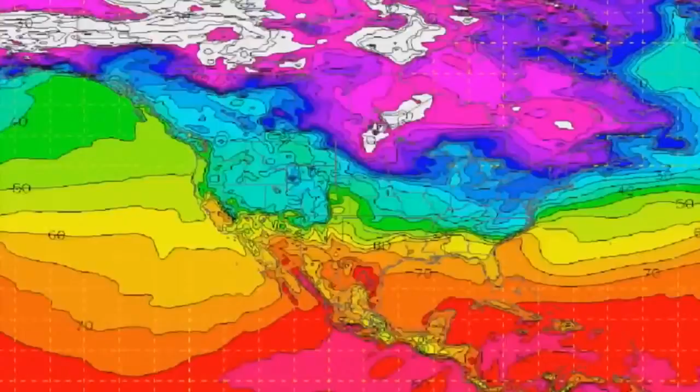In the real world, the answer to the question of can we see into the future has been answered with a resounding no. In our ever-evolving society, the trend today is to look toward the future by relying on predictive modeling to best predict the probability of an outcome. But we all know that even these well-thought-out predictions based on data often turn out to be not so predictable.

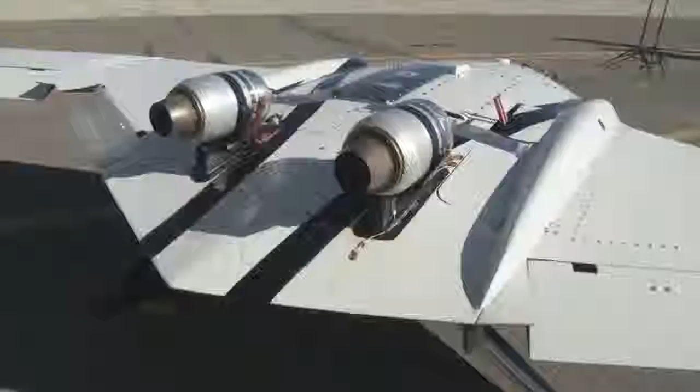Although it's clear that future events remain virtually unknowable, there is one group within NASA that comes as close as you can to seeing into the future. Throughout NASA's field centers, members of the Fixed Wing Project team are peering into the future every day and coming up with concepts that they believe will be on the next generation of aircraft. Because it takes years to plan and develop these concepts, the hardware and theories that are being tested today will be key components that enable the next generation of aircraft to take flight.

On this episode of NASA X, follow us around the country as we visit members of the Fundamental Aeronautics Program's Fixed Wing Project, who are developing the framework that will shape how aircraft of the future will fly. Take a look behind the gates of NASA to see what some of these new ideas look like and how the engineers of NASA are paving the way for the ideas that will change the future of flight.

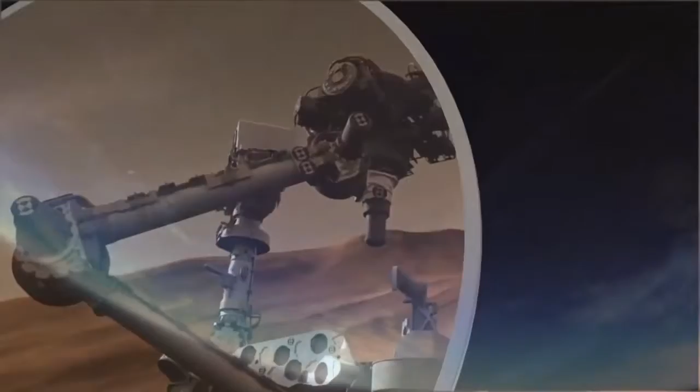To the untrained eye, most of the aircraft of today look very similar. This is because over the past century of flight, aeronautical engineers have worked hard to optimize passenger aircraft to the point where they are as efficient and safe as possible. As a result, the basic tube and wing shape has been configured and examined from every possible angle, making it the most efficient design possible today.

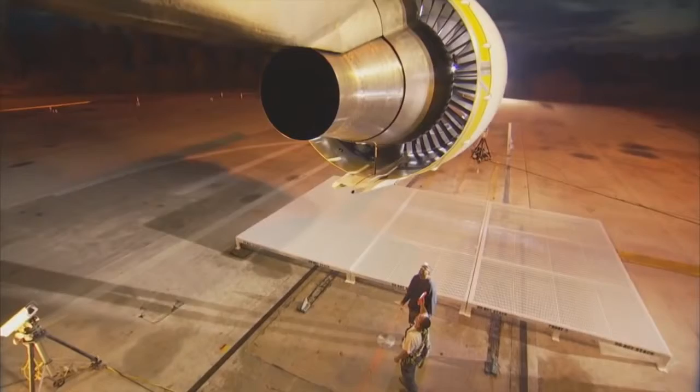Although aircraft have looked basically the same over the past few decades, if you look closely, you can see some of the major design changes. Wings that were once swept back more dramatically now are less so because of advances in aerodynamic shaping. Engines that spewed emissions by the ton are now much more efficient. Materials that were once so heavy that they significantly weighed down a craft are now much lighter and stronger.

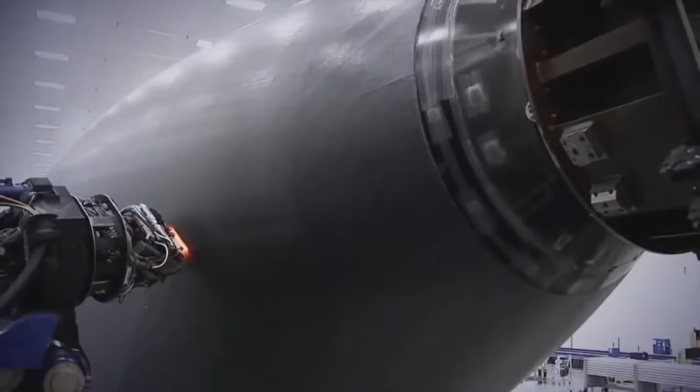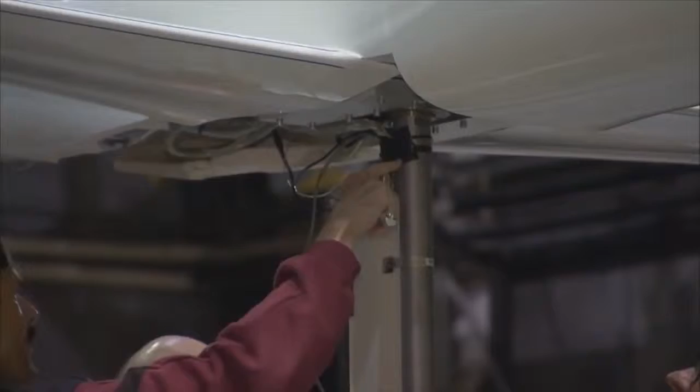With all this improvement and efficiency, it is fair to ask if there is anything else that can be done to make flight even better. The answer is of course yes. Behind the gates of NASA, there are scores of researchers who know that we can still make aircraft better because they are working toward these long-term goals every day. Some of these researchers from the Fixed Wing Project are working on so-called N+3 configurations and goals.

In mathematical terms, the letter N is where you start now. N+1 is the next step. N+2 is just beyond that, and so on. Here in the Fixed Wing Project, N+3 equates to aircraft that will be flying in around the 2030-2035 timeframe. For this team, everything is on the table, including engines, fuels, wings, and fuselage shapes.

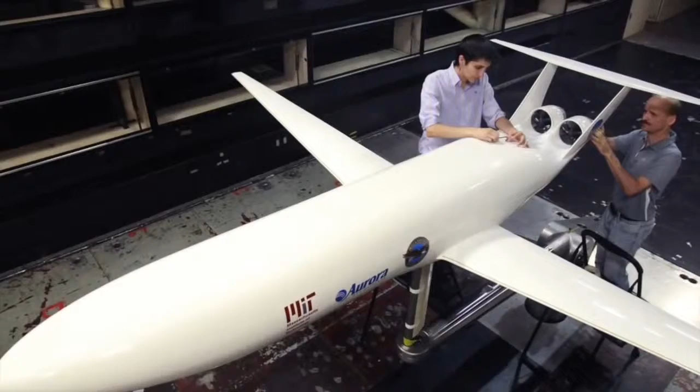Well, we need to remember the first A in NASA is aeronautics. So it's the National Aeronautics and Space Administration. Aeronautics is the field of research for airplanes. The airplanes that fly today were researched and experimented with within NASA many years ago. So we're trying to continue that tradition, that important work that we have done for the nation and the world, for 20, 30 years from now.

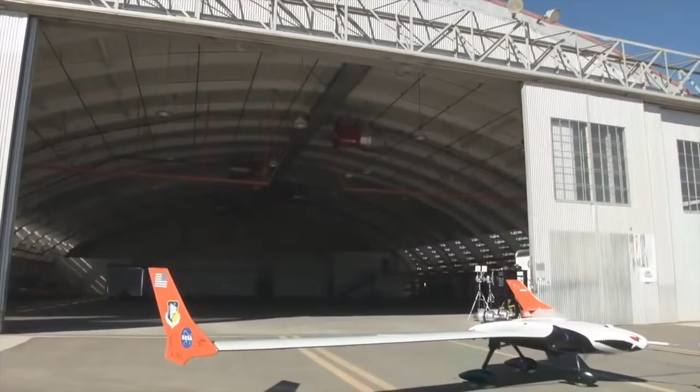Fixed Wing is a NASA research program where we are doing activities to try to improve the airplanes that we're going to be flying in the future. We're trying to make them less noisy. We're trying to make them better for the environment. We're trying to make them in a fashion that they will use less fuel.

The research we're doing is important because air travel is such an important part of your life. People travel, and even if you don't travel, cargo gets carried every single day. You use something every single day that gets carried by an aircraft. It's part of our way of life these days, and it often gets taken for granted. There are challenges though, so we are focused on exploring and developing technologies and concepts to improve the energy efficiency and environmental compatibility of transport aircraft.

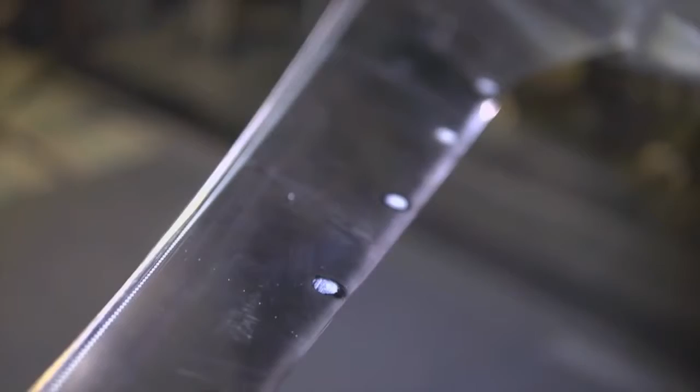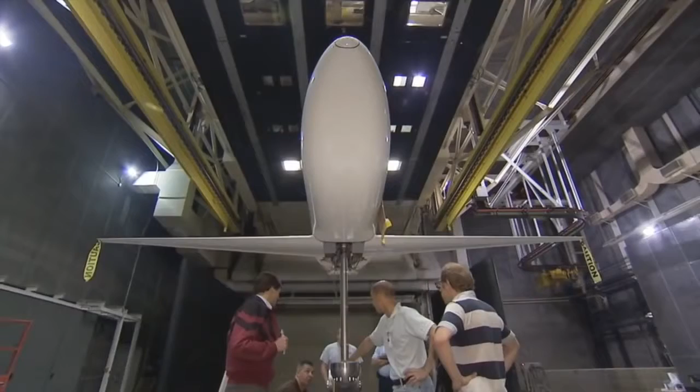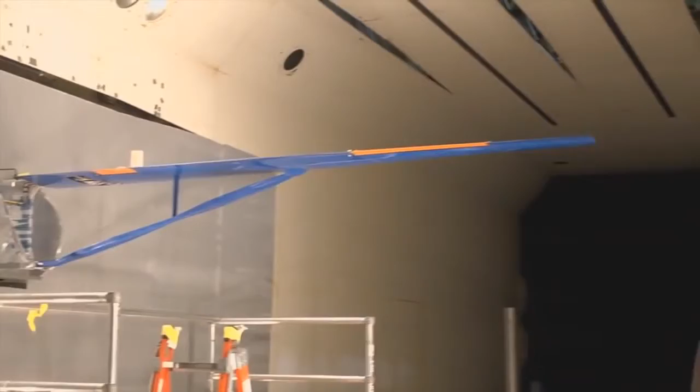With this mandate to significantly lower noise and emissions and increase performance for subsonic aircraft, there will be a need to address virtually every aspect of the current aircraft configuration, including developing new materials and engines, testing alternative fuels, and even changing the fundamental shape of the aircraft. All across the country, fixed-wing researchers are doing just that. Major advancements are being made into the understanding of how future aircraft will fly. Because there are so many areas of study, let's first look at something that has the potential to be used today as well as in the 2030 timeframe: alternative fuels.

On this beautiful morning at NASA Dryden in California's high desert, a test called ACCESS, or the Alternative Fuel Effects on Contrails and Cruise Emissions test, was performed to study the effects of alternate biofuel on engine performance, emissions, and aircraft-generated contrails at altitude. For this test, 2 aircraft were flown in tandem. The first is NASA's DC-8, which will be burning an alternative fuel.

The second aircraft is NASA's Falcon that will fly directly behind the DC-8 to measure and characterize the emissions coming out of the engines from the alternative fuel. Here is NASA's Bruce Anderson to explain. NASA's role is in assessing the combustion characteristics of alternative fuels, as well as determining how these fuels will affect the performance and emissions from aircraft.

To understand how aircraft affect the climate, we need to make measurements at cruise altitudes. So the focus of ACCESS, or the alternative fuel effects on contrails and cruise emissions, was to fly behind the DC-8 in flight and look at its emission and contrail characteristics as we changed from standard jet fuel to a fuel that was a blend of a fuel that was made from camelina plant oil, and also added 50% of Jet A to that.

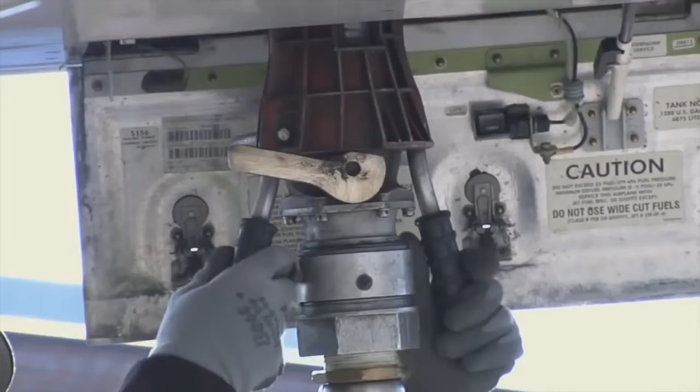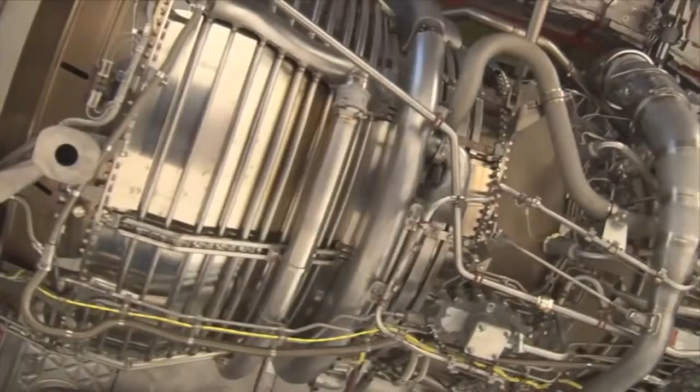The fuel also has to have similar characteristics in terms of density and volume to kerosene. So what we're looking at is drop-in fuels. A lot of the fuel systems on the aircraft are designed to rely on the aromatics in the fossil fuels to swell the seals to make them leak tight. So when we fly an alternative fuel, we have to mix it with standard fuel to retain those properties. Otherwise, the fuel would just leak out of the aircraft.

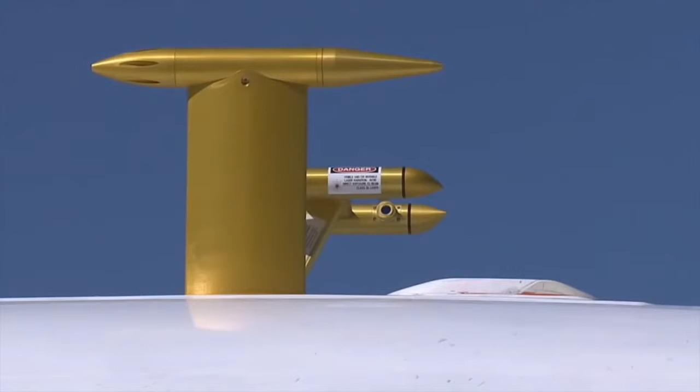And then the second thing we're looking at is just the emission characteristics. By that I mean the amount of pollutant generated per kilogram of fuel burn. After the first few flights, it was shown that using these types of alternative fuels could significantly reduce emissions at cruise altitudes, particularly soot emissions. Work continues to better understand how to use these fuels and how to make them even more efficient for future aircraft.

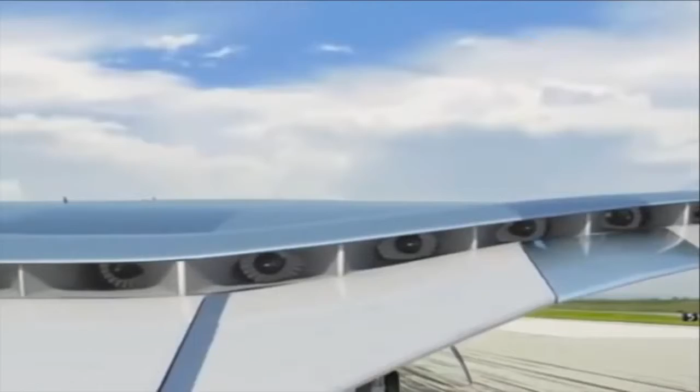Other than alternative fuels, there are some other ideas out there for finding more efficient ways to power aircraft. If we look on our roads today, many of the cars that are now being driven run on a combination of fuel and electricity. The idea that aircraft could do this seemed far-fetched only a few short years ago, but today, this idea is gaining traction. There are several ideas on how to do this, so let's take a look at a few.

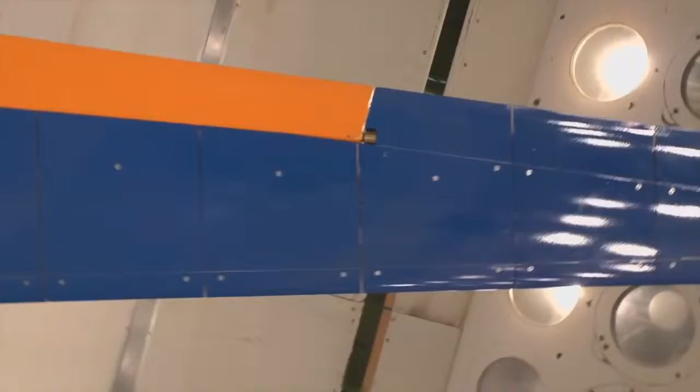Here, a team is looking over a new Boeing aircraft design called Sugar Volt. This unique design has several interesting changes, like the truss-braced wings that have the potential to reduce the drag of the wings by making them longer and thinner. Because thin, long wings have the tendency to flex more, designers have included a clever, efficient truss structure to support them. This design has the potential to reduce drag and weight, thereby making the craft more efficient to operate.

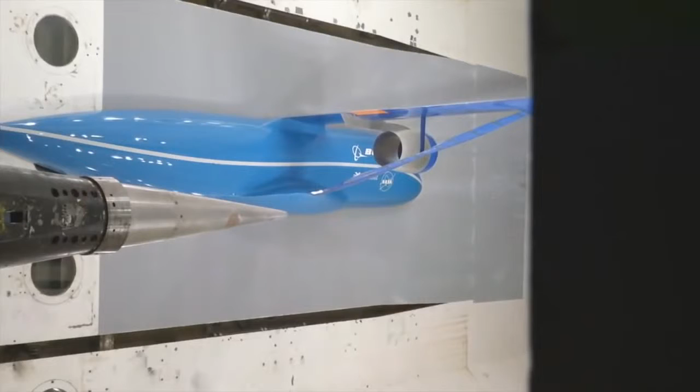At first glance, those unique structural changes may look like the biggest game changer for this type of aircraft, but the Sugar concept holds another surprise as well. In the case of the Sugar concept, what's less obvious to the eye when you see it is that it has an unconventional propulsion system. It's a hybrid gas-electric concept that's closer to what you see in a Prius. It has batteries and a gas turbine engine technology.

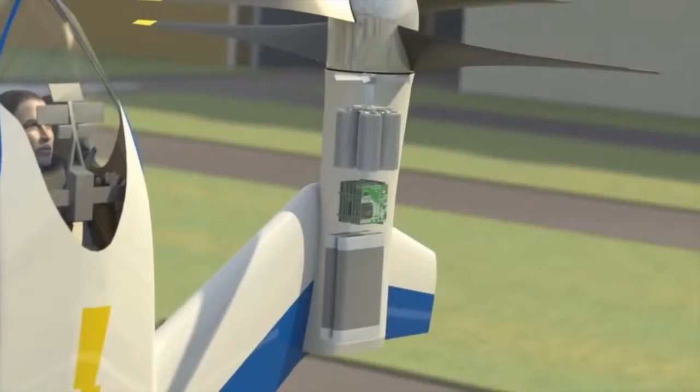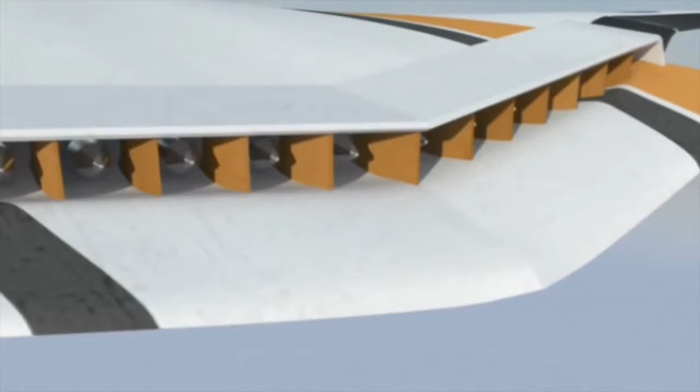It requires advances to battery technology, but those are happening throughout the world independent of the aerospace industry, and we're trying to leverage that. We do it on cars, we should be able to do it on airplanes eventually. The challenge is to take those batteries and have enough energy or power content and have them be lightweight. Where we are today, I think, is we're at the dawn of the age where we can start to see electric propulsion or hybrid electric propulsion.

And you'll see it on smaller aircraft first before you see it on the large commercial transports. But that's what we're working towards. That's good for cleanliness, it's good for noise, it's good for energy efficiency. It has its challenges. That's why we're working on it, and that's why it's not being done today.

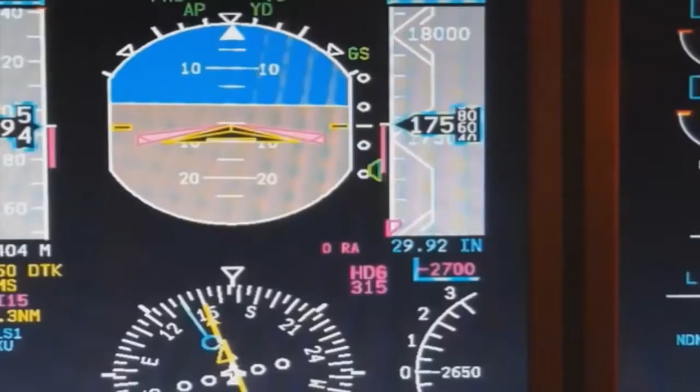The idea behind this vehicle is to have its twin engines burn fuel when great power is needed, like at takeoff. But when the craft is in a cruise configuration, a switch can be made over to a battery electric mode to supplement or even replace power to the engines. If successful, this could reduce the amount of fuel burn by up to 70%.

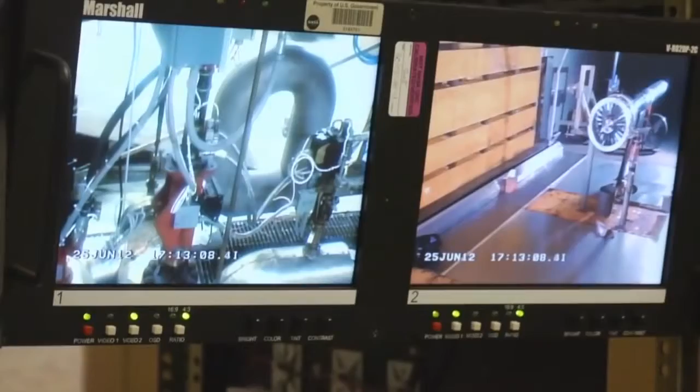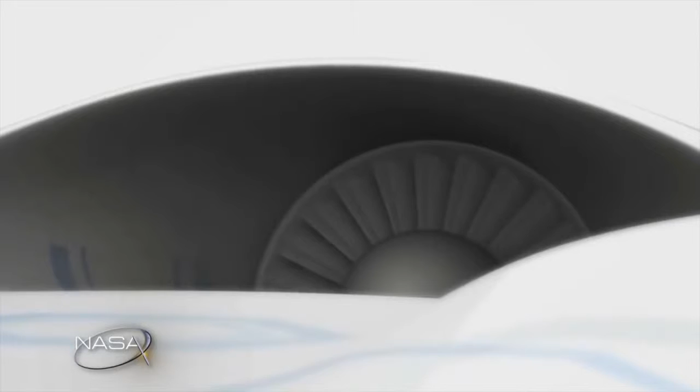Another concept called turbo-electric propulsion is being studied here at the NASA Glenn Research Center. Here is NASA's Jerry Brown to explain. There's not been electric airplanes except in very small size. And the reason is that electric motors and generators tend to be too heavy for flight. We're hoping to change that, and we're hoping to get a benefit from saving a whole lot of fuel in the process. The type of electric propulsion that we're talking about today is turbo-electric propulsion.

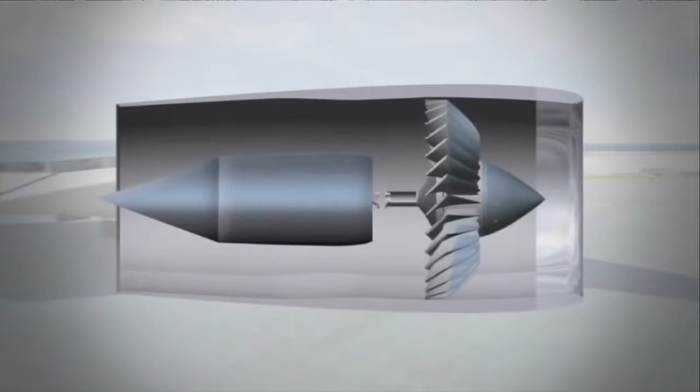We're going to keep the turbine engine because it's really good as far as a lot of power in a small power plant. And then we're going to use its power to drive a generator, send electricity to motors that drive fans that do the propulsion. This concept will look very different from vehicles of today as well. Potential designs include 2 large turbine engines on the wingtips that will drive 2 large generators inside the body. The generators will in turn power a number of fans, providing the propulsion the aircraft needs to fly.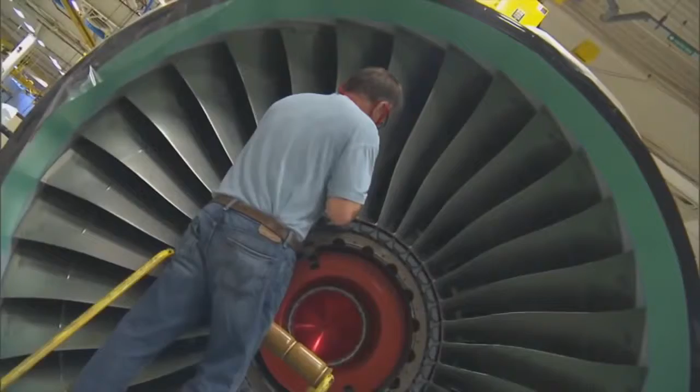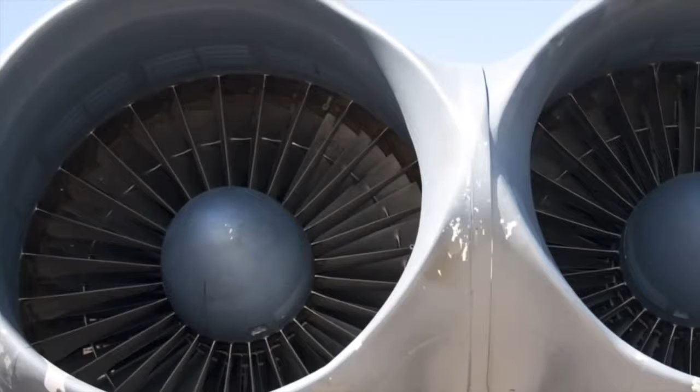What we want to do here is we want to be able to break the turbine engine from the fan, and that gives the aircraft designer a lot of freedom. If he can move the turbine engine somewhere else in the airplane, that may itself have advantages. The engine and the fans don't have to turn at the same speed. You don't even have to have the same number of fans. And that's what we're really looking for, is we want to have an array of a whole bunch of fans, maybe 15 of them, say, and just 2 engines. You like to keep just 2 big engines because the big engine is much more efficient.

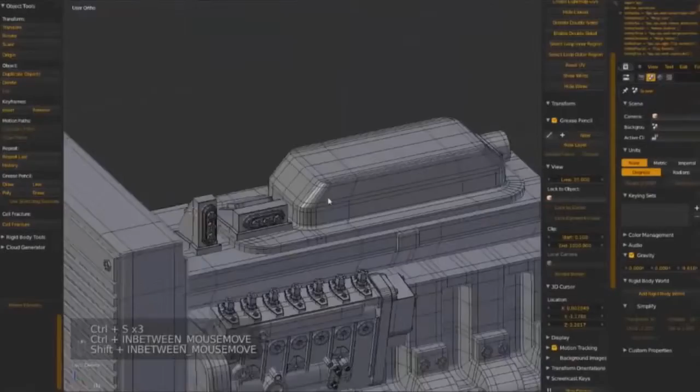This idea is intriguing, but big changes need to be made to make it viable. One major challenge is the need to reduce the size of the generators, because the generators of today are way too big to fit on an aircraft. One idea that the NASA team is looking at is a way to remove the current type of copper windings in the generator and replace it with superconducting material. This change would allow the generators to shrink, making them viable to fit on future aircraft.

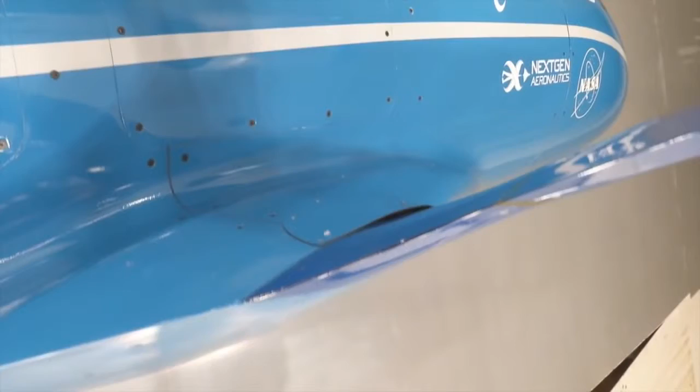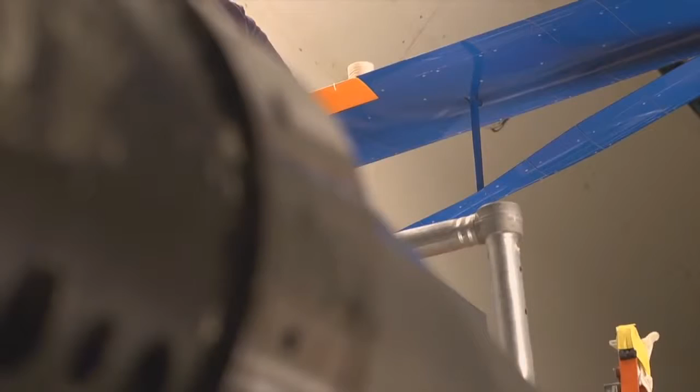As we've seen so far, new aircraft designs are coming online that have the potential to greatly improve aircraft efficiency. Another of these revolutionary designs has come out of a joint MIT and NASA study. This unique design is called the double bubble and has the potential to reduce fuel burn by up to 70% as well. So the MIT D8 double bubble design was something that we've been working with MIT on for a number of years. The idea there is to take some of the lift that you would normally get from the wings and try and move that to the fuselage.

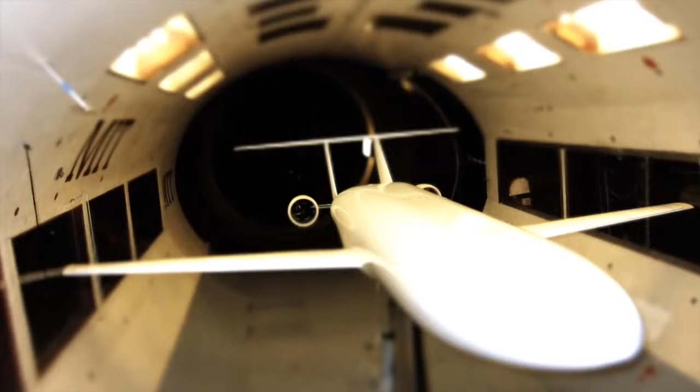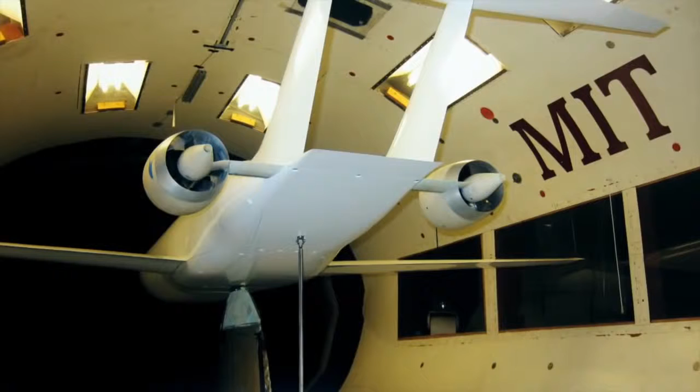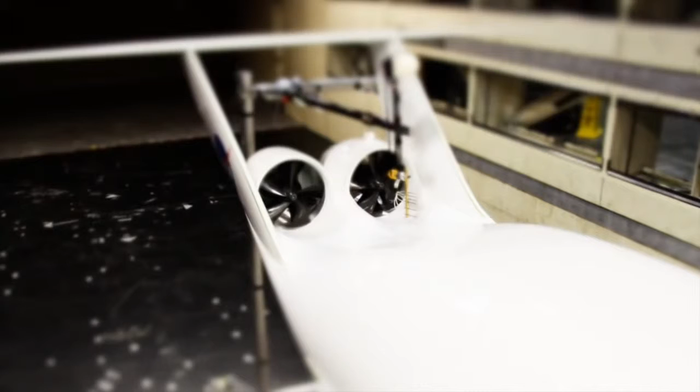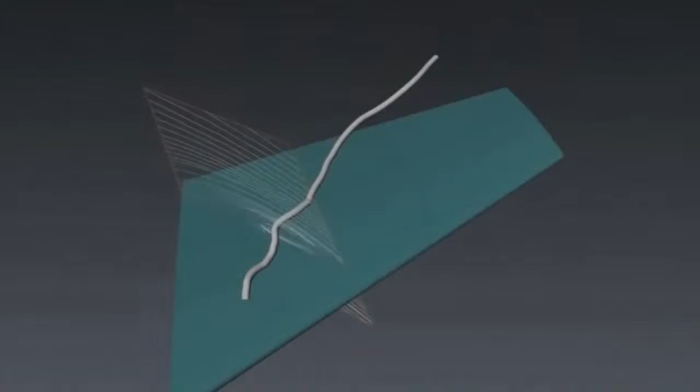Aiding much of the work is improved computational fluid dynamics and wind tunnel testing. Right here in this building we have the Pleiades supercomputer, which is one of the largest supercomputers in the US and in the world.

It has 200,000 processors working on the problem if you use the whole machine on one problem. So it's a very large machine, and we need that very large machine because we need to do very big problems here at NASA. The aeronautics research director that we're using it for is to try and simulate the flow over these N+3 configurations.

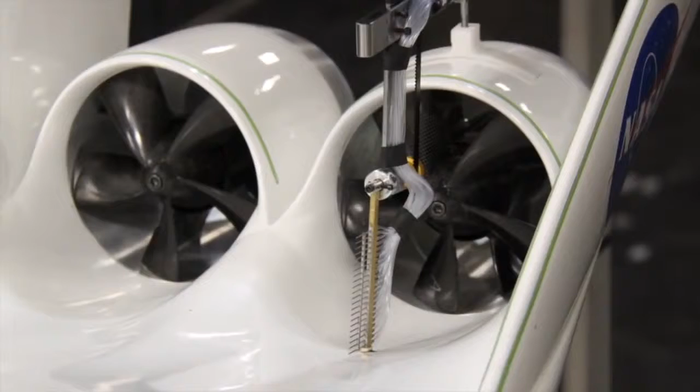So in order to capture all the detail you'd see on a vehicle like this, including what's going on inside the combustors of the engines and things like that, you need to have a lot of grid points to resolve all the fluid motion inside those engines over the airplane, and having that many grid points to resolve all that physics in 3 dimensions creates very large computational grids that require very big machines to advance the equations that govern the fluid motion and get these CFD, computational fluid dynamics solutions that we use to make our assessments.

Aerodynamicists of today are able to model ideas on computers, which allows them to test many different configurations before a wind tunnel model is ever built. Once a design is agreed upon, a wind tunnel model can then be fabricated and tested. This process was used for the double bubble as well, but the wind tunnel test showed surprising results.

The good news is we've just completed the first test of this configuration in the Langley 14x22 wind tunnel at NASA Langley. And it showed even a greater reduction or a more fuel efficiency benefit to this technology than we had predicted on paper with our lower-order models. So we're trying to digest the experimental data that show this nice benefit in fuel efficiency from this configuration.

At the same time, we're also using the supercomputer here at NASA Ames, the Pleiades supercomputer, to do computational fluid dynamics CFD runs of these same configurations and see if we can confirm that benefit on the computational side as well. Testing will continue on the double bubble, and if the results hold, you may see this type of aircraft at an airport near you in the future.

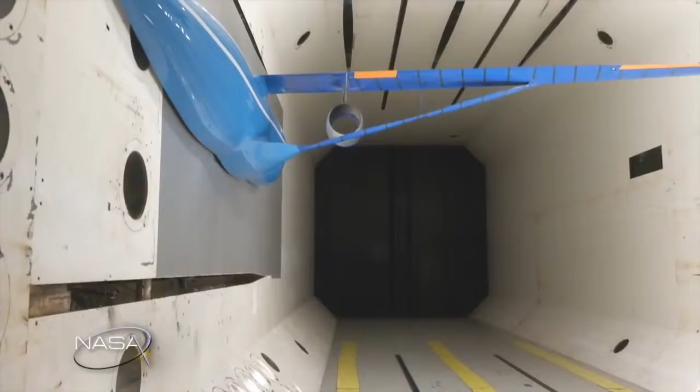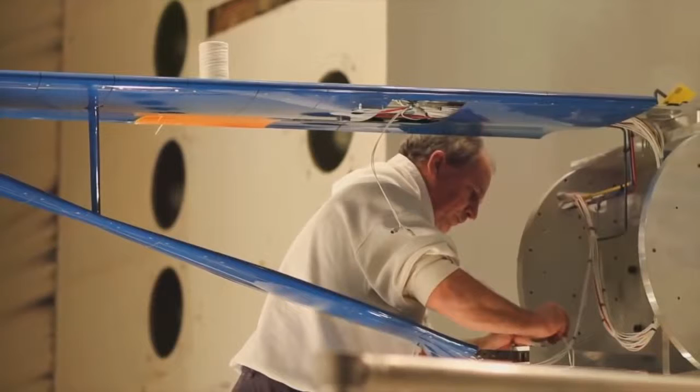When testing aircraft, many different stages occur. We have already mentioned CFD and wind tunnel testing, but another tool in testing future designs is to build a flying scale model. Although CFD and wind tunnel modeling is the mainstay, often test flights of these small, scaled-down versions of an aircraft offer some of the most dramatic results for researchers. That is the case with this aircraft, called the X-56.

This aircraft is being used as a test bed to understand how different wing configurations work and how a unique idea called active control may be used in the future. The whole concept behind the X-56 is that they've long known that a very long wingspan vehicle is more efficient than short wingspan vehicles.

Problem is though, when you get a very long wingspan, you start to get into issues with flutter modes that start to creep into the vehicle, so that the wing will go unstable and in extreme cases will rip off the vehicle. To get around that problem, you can use active flight controls to suppress those flutter modes.

Active control is you put things like accelerometers within the wing, and as soon as you sense that the wing is starting to get into these flutter modes, you use the control surfaces behind the wing to damp that out. So the airplane, as it's flying, is continually fighting these modes and keeping the wing straight and stiff. Then you can build a lighter, longer wingspan vehicle that is more efficient.

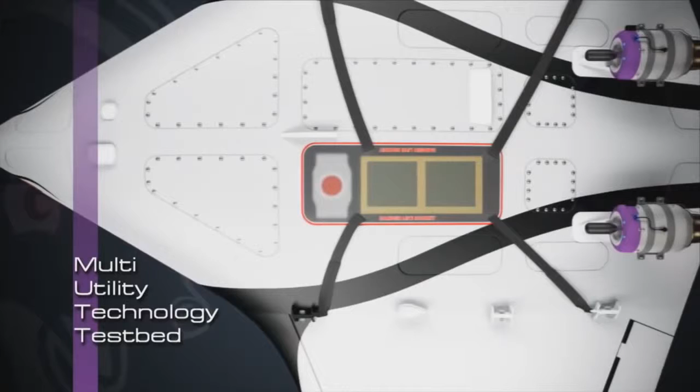This vehicle, as funded by the Air Force, was built as a multi-utility technology test bed. They call it the MUTT for short, and it is built to do a lot of different kinds of testing in aeronautics. The wings are removable. You can put on a stiff wing, you can put on a flex wing, you could do a joined wing configuration. We can learn quite a bit from testing this kind of vehicle.

Right now the focus is on flexible wings and active control of flexible wings, but in the future there are many experiments that can be done with this vehicle. The research on the control of lightweight, flexible wings being performed today on the X-56 is key to enabling the long, thin, low-drag, and low-weight wings of tomorrow's N+3 configurations.

Much is going into understanding what it will take to improve the already incredibly efficient aircraft of today into ultra-efficient vehicles of the future. Although we don't have all the answers yet, it's clear that NASA and its brilliant engineers and researchers are helping to lead the way to a safer and more efficient way to travel.

We are nowhere near the maximum that we can get out of this industry. And there is a lot of work to do, and that's what my team is doing. That's what we're doing within NASA, and I cannot wait for the future.